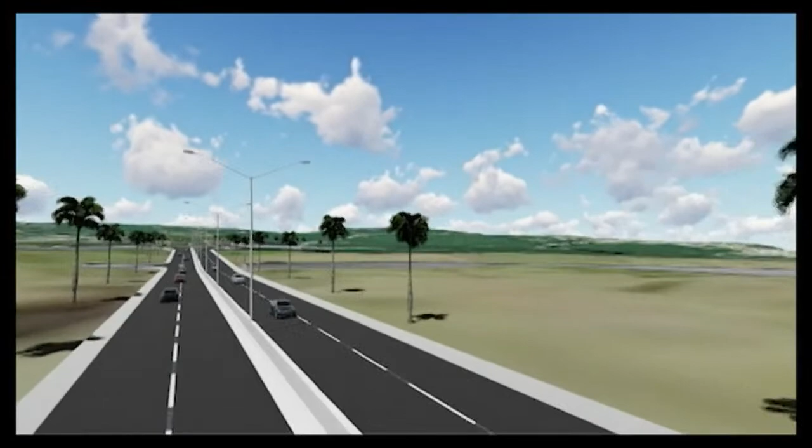Welcome to the virtual town hall public meeting for the proposed Montego Bay Perimeter Road, Long Hill Bypass and West Green and Barnett Street upgrade in St. James. This public meeting by virtual means is being undertaken by the National Road Operating and Constructing Company, NROCC, grantors for Highway 2000, for the presentation of its environmental impact assessment for the proposed Montego Bay Perimeter Road project. This process is heavily regulated and monitored by the National Environment and Planning Agency, NEPA.

Why this town hall, and why not a face-to-face meeting and consultation by NROCC with stakeholders? The ongoing COVID-19 pandemic and restrictions on public face-to-face gatherings have limited the ways in which stakeholder engagement on project-related matters can take place. COVID-19 doesn't mean a cessation of stakeholder engagement. It means finding other legally permissible ways of engaging with stakeholders and the public, hence this virtual town hall.

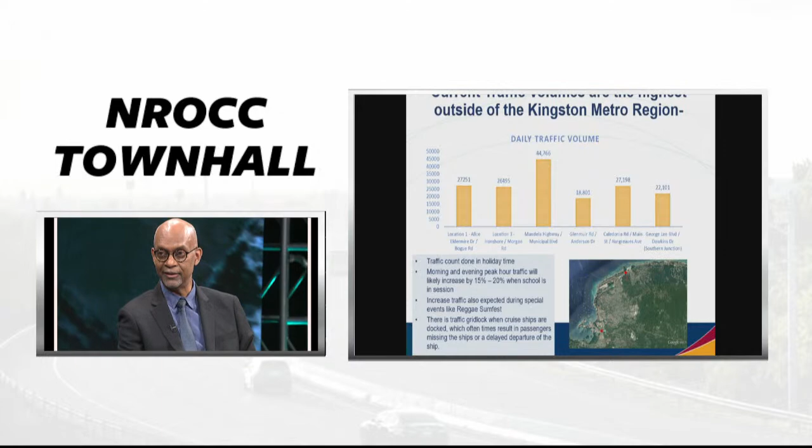Compounding this problem is the issue of the traffic in Montego Bay. In fact, until we actually started looking at the Montego Bay area, it was difficult to understand why there was so much traffic until we actually started to count the traffic. And at that point, we recognized that the traffic in Montego Bay was actually, outside of Kingston and St. Andrew, the highest traffic in the country.

So in fact, the Howard Cooke Boulevard, Alice Eldemire, Bogue Road intersection had some of the highest traffic volumes anywhere, as I said, outside of Kingston and St. Andrew and Portmore. We also looked at other issues which compounded the problem of traffic, which is the flooding issue. As anybody from Montego Bay knows, the North and South Gully are notorious for flooding. And when those become over capacity, then we have significant flooding in Montego Bay.

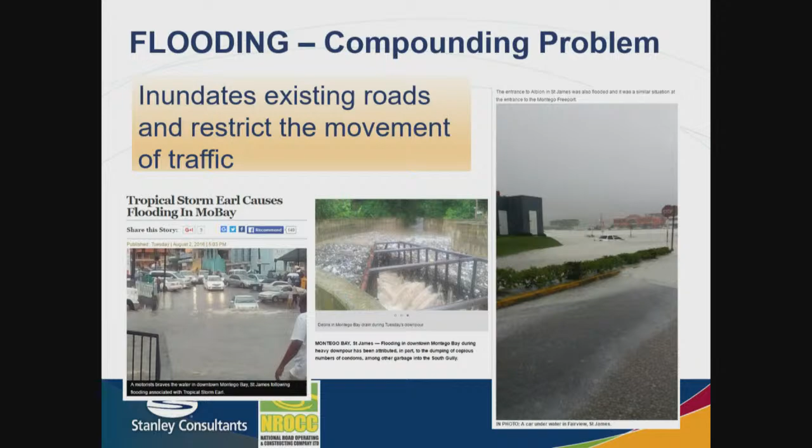Also compounding the problem is the cruise ship arrivals into Montego Bay. Over the next 3 years, the cruise ship arrival passengers are expected to grow from about 645,000 to about 745,000. Similarly, the arrivals at the airport are also expected to grow significantly over this period of time. Also compounding the problem is the many movements that we have across the Howard Cooke Boulevard.

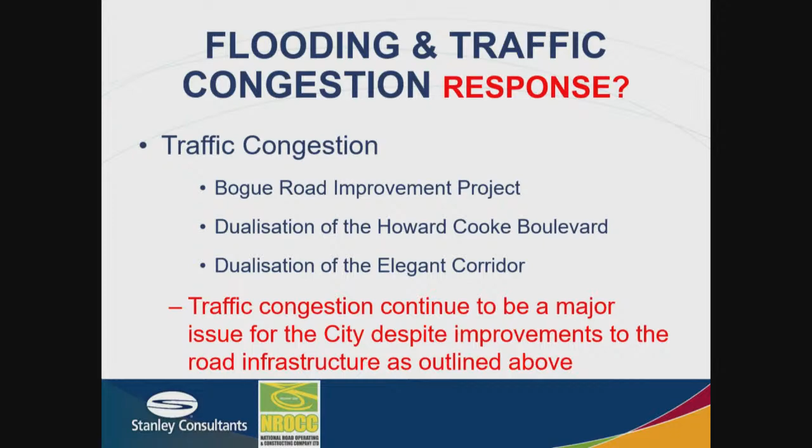So a number of steps have been taken to try and improve and correct the problem. The Bogue Road improvement, the dualization of the Howard Cooke Boulevard, the dualization of the Elegant Corridor. But despite all of these, we continue to have the traffic congestion problems in the city. But how does the traffic congestion manifest itself?

So if you look at two of the main corridors which go into Montego Bay, and most people know these two roads, typically we call them the top road and the bottom road. Gloucester Drive on the bottom and the top road, which is Queens Drive. If you look at the time it takes to get from one side of Montego Bay to the other side of Montego Bay, you quickly recognize that there are significant delays as you go through Montego Bay.

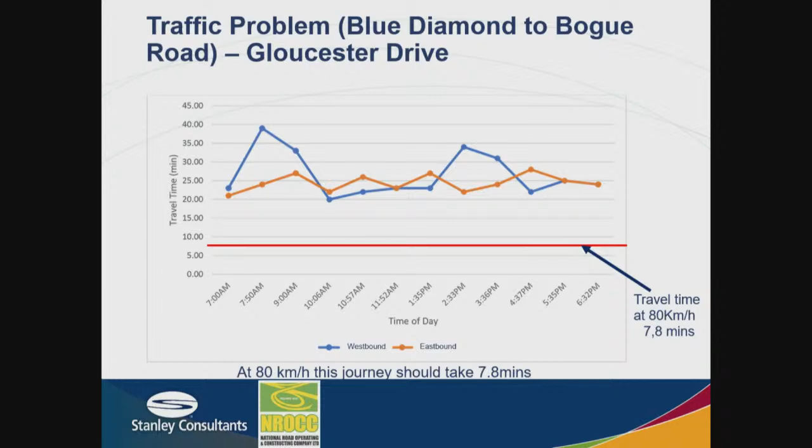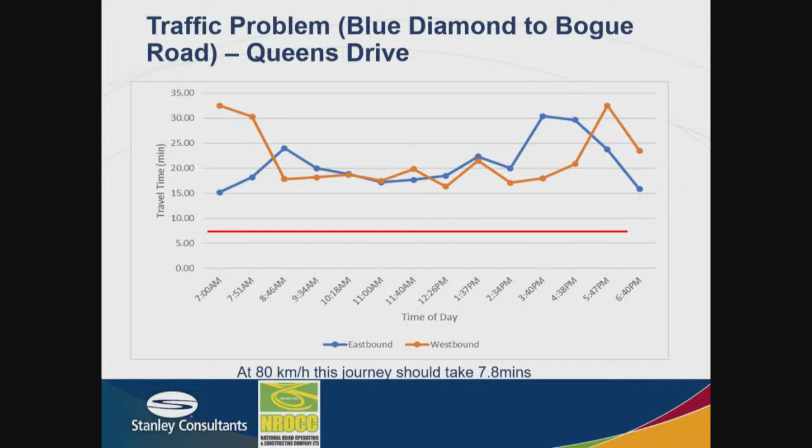Similarly, if you look at Queens Drive, which is the other road, the other alternative, so when you're coming into Montego Bay, typically most drivers will have two options, either driving along the bottom road or driving along the Queens Drive, which is what we call the top road. You have the same issues, significant peaks, significant delays in terms of getting from one side of the city to the other. Again, as I said before, a distance that if you're traveling normal vehicular speeds, it would take you of the order of 7 or 8 minutes to travel across the city.

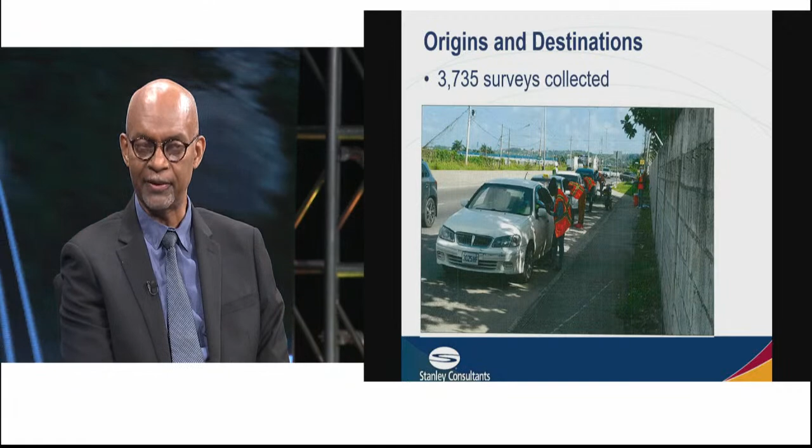So we tried to understand what was causing the problem. Why is there a congestion problem? Where are people coming from? And where are they going to? And so in order to do this, we set up what we call 7 traffic analysis zones throughout the city, where we started stopping people and asking them questions about where they're coming from, where they're going to, in order to try and understand why we have this significant congestion problem in Montego Bay, and would a bypass, for example, help solve that problem? Because we needed to understand how many people wanted to go to the city, as against how many people were just passing through the city.

So we did about 3,700 surveys. And out of those surveys, we came up with what we thought was an estimate of how much traffic would likely go around Montego Bay rather than going to Montego Bay.

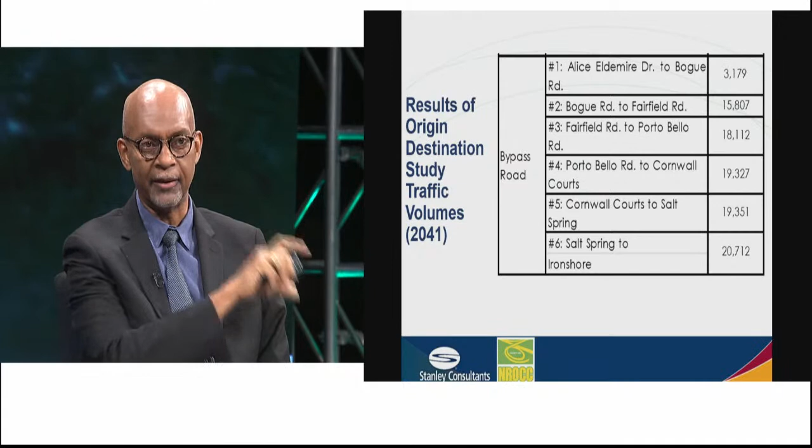That's how many people were destined for the town of Montego Bay, as against how many people wanted to either go through to Negril or vice versa, go through to Ocho Rios. And based on that, we came up with some projections in terms of what the traffic on the bypass would look like, how many people would choose to use the bypass if a bypass was built.

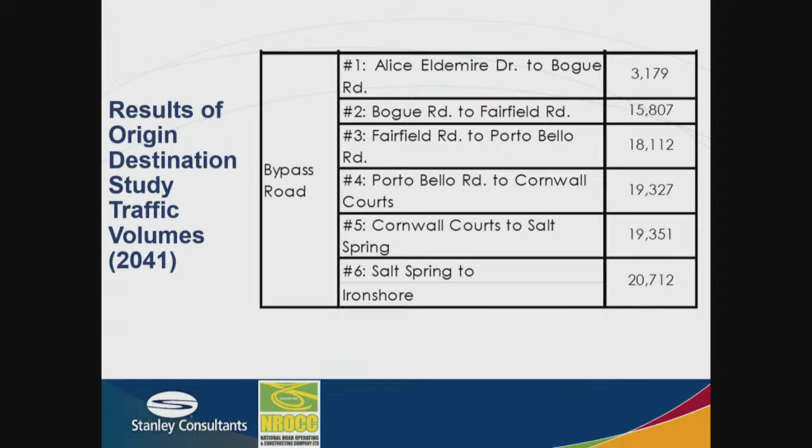And what you see on the screen are some estimates of the traffic along the various sections of the bypass. So the bypass starts on the Iron Shore side, actually at the bottom of the screen. And so from Ironshore to Salt Spring, there'll be of the order of 20,000 vehicles on the bypass. Between Cornwall Courts and Salt Spring, of the order of 19,000 vehicles. Between Porto Bello and Cornwall Courts, another 19,000. I'll show you the alignment so you can get a better feel for where these locations are.

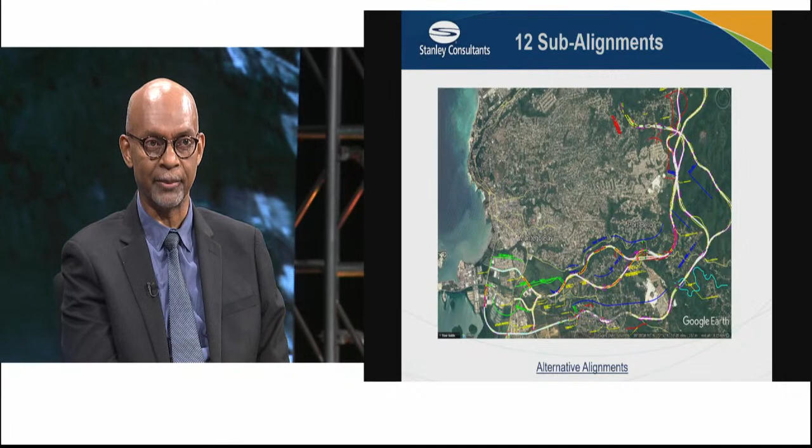So once we understood how much traffic would be on the bypass, we then started looking at what are the alternatives for building this bypass road around Montego Bay. And so we did a number of different alternatives. In fact, we did 12 sub-alignments looking at different areas, different ways to get around Montego Bay. Obviously, because Montego Bay is now built up, we had to find a way through the existing developments which are on the bypass. And these options included a number of tunnel options.

In fact, interestingly, when we did this study in 2001, when the original studies for the Montego Bay bypass were done, tunnels were some of the options which were considered at the time. And so we looked again at the viability of building a tunnel, which would shorten the distance around Montego Bay. So we came up with a number of criteria, and we used these criteria to evaluate the various options. And from these options, we came up with what we call a preferred alignment.

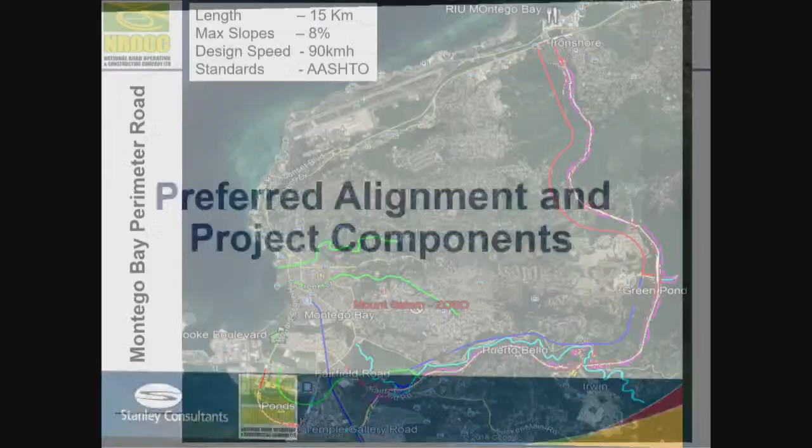And so that preferred alignment starts at about Iron Shore. So if you're coming from Kingston, just about where Iron Shore is, where Blue Diamond Shopping Center is, most people in Montego Bay know Blue Diamond. We start just by the gas station at Blue Diamond, come up the hill above Cornwall Courts and wrap around, going back around onto Bogue Road. And I'll show you a tour of what that alignment looks like.

So this is just a quick tour, which takes us along the Montego Bay bypass alignment, starting from the Howard Cooke Boulevard side. Just giving it a little time to load. Thank you.

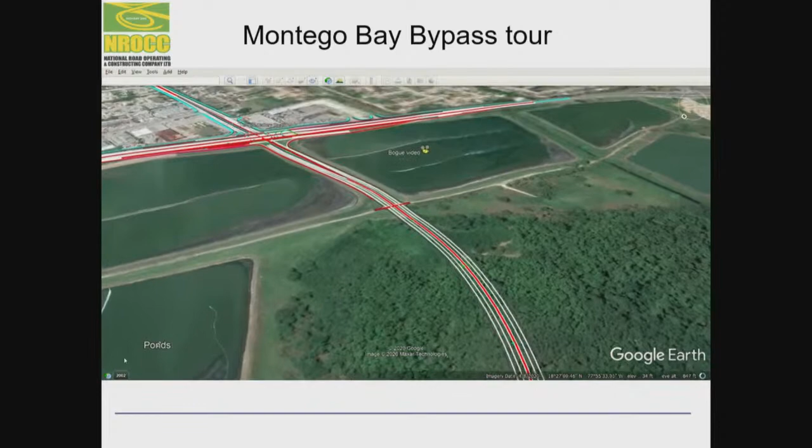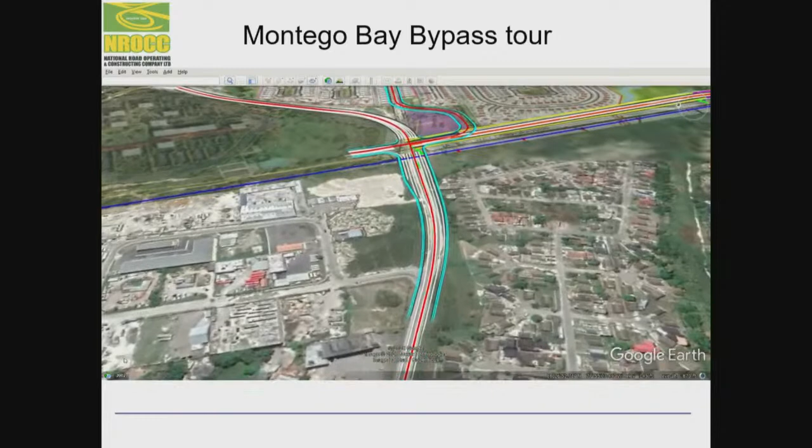All right, so if you think of driving down the Howard Cooke Boulevard going west, we continue going west, and then we wrap around the sewage ponds, which everybody in Montego Bay knows, on Bogue Road. From there, we go across Bogue Road itself with a grade separated interchange. We go past ATL Motors on the right and JUTC on the left. And then we find our way through Temple Galley Road, which is a narrow road which we're widening to 4 lanes.

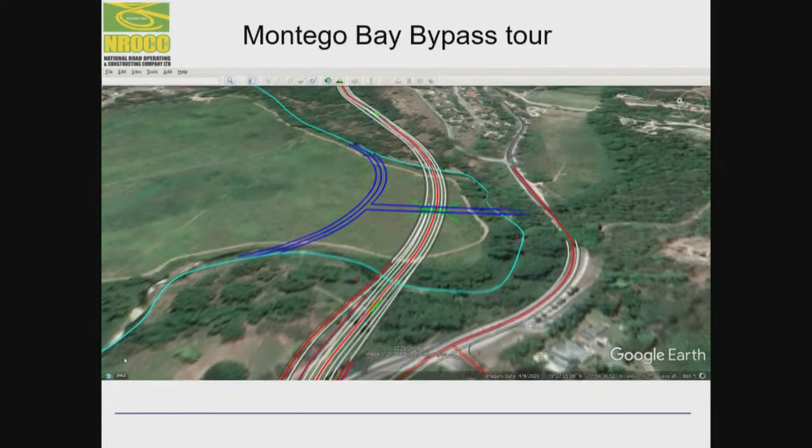From there, we go past Bogue Village and past what is supposed to be the new UWI campus in Montego Bay. We go across Fairfield Road, and from here we're running pretty much parallel with the Montego River, climbing up the hill, trying to find the way through the existing developments. So we climb up the hill, again, for people who know Montego Bay. On the left, we have Portobello developments, and on the right, we're coming up to Irwin, the Irwin developments.

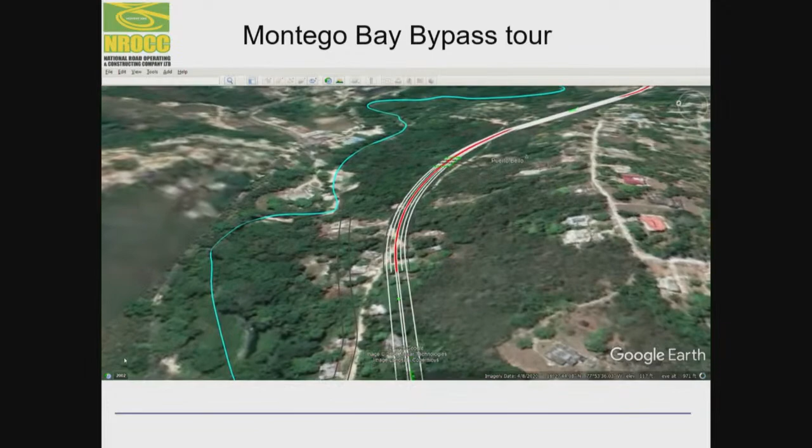We have, obviously, a lot of new infrastructure being put in, new bridges to come across the Montego River in this location, and a lot of new interconnections. So we're connecting from one side of the river onto the other side of the river, from the Irwin side onto the Portobello side. And also at the same time connecting some rural roads, the road from Adelphi, tying it into the highway at this point. So at the Irwin location, we have a new interchange.

From Irwin, we then continue up the hill. We're now almost at the highest point along the alignment, which is in the area of Cornwall Courts, just behind where we have Green Pond High School. One of the things to note as we go through this area, there are a lot of lands being opened up for development. So this is not only a transportation project in the sense of reducing travel times, but it's going to open up significant new lands for development in that area.

So we go past Cornwall Courts, past Green Pond High School, and then we start making our way down on the other side of Montego Bay. So we're now on the Iron Shore side of Montego Bay. From here, we go through the South Spring developments, and then down the hill, coming up to Iron Shore on the right-hand side, again opening up new lands for development,

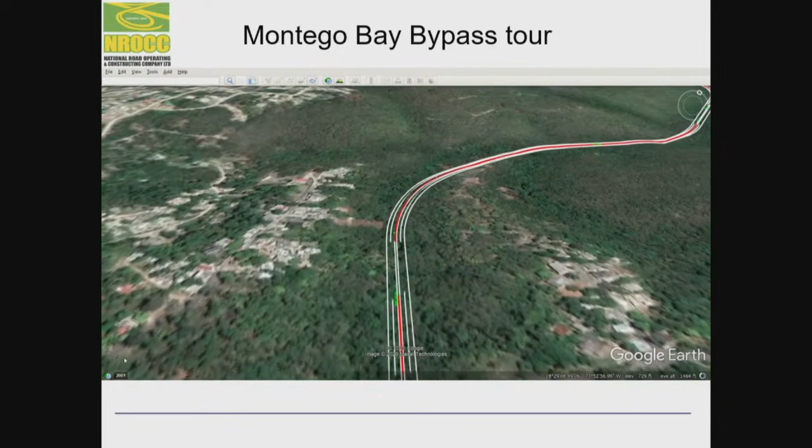and then coming down, finally down into the North Coast Highway, again down into the Elegant corridor with the hotels on the northern side. So this is just an illustration of what the Montego Bay bypass will look like.

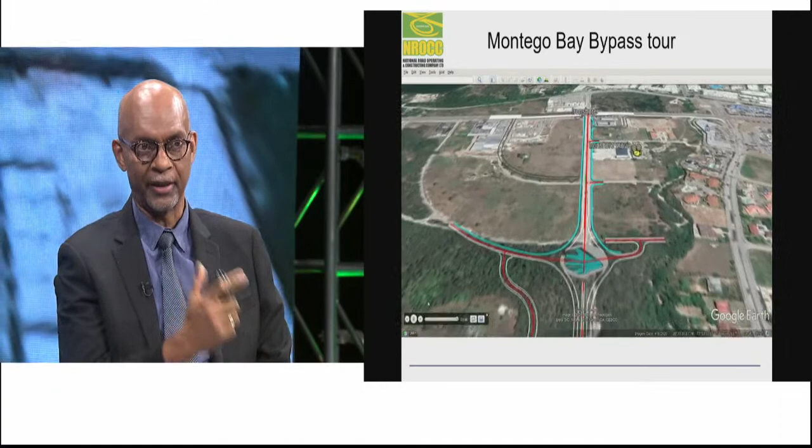Part of the project is also what we call the Long Hill bypass. And the Long Hill bypass is another critical part of the project, which will see us bypassing what is currently called Long Hill. So just to finish up, as the video comes in, we're coming into the Elegant corridor with the hotels on the northern side.

So this is approximately 15 kilometers of roadway, and what this will do is deal with the congestion for people who don't necessarily want to come to Montego Bay, but who want to go around Montego Bay, or people who work on either side of Montego Bay, and therefore who don't necessarily need to go into downtown Montego Bay.

But as I was saying, another critical part of the project is the Long Hill bypass. So again, for anybody who lives in Montego Bay, the Long Hill Road is a winding road which connects the Montego Bay area to the south of the country. And so what we've done is to tie this new Long Hill bypass into the project. So part of the project will see us building what will actually become the first section of our Highway 2000 project, from Montego Bay going all the way back to Mandeville on the other side.

Let me just see if the video will start up.

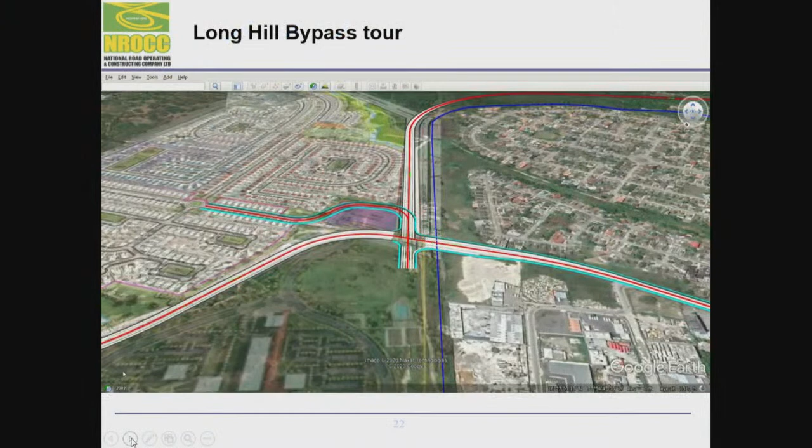So as I was saying, the Long Hill Bypass project is approximately 10 kilometers. It starts along the existing Montego Bay bypass. So just where we were talking about earlier, where the Bogue Village starts, that's where the Long Hill bypass starts. So for those people who normally come down Long Hill through that winding road, frequently blocked by trucks and accidents, this is what we call the new Long Hill bypass. This will become the new connection of Montego Bay to the southern side of Jamaica.

Going down to Macfield. So the Long Hill bypass comes up through Bogue Hill, gets up to Anchovy. At Anchovy, we have a new interchange, which connects back the Anchovy main road to the new Long Hill bypass. From there, we have virtually green areas. So this is the Anchovy area we're coming across. From Anchovy, again, on a new alignment, continuing all the way down to Montpelier.

So the section that we're building as part of the Montego Bay Perimeter Road project is a section from Montego Bay to Montpelier in the first phase. Once that is completed, then we will start the construction of the other sections of the roadway.

You've got 15 minutes. Your time is just about up.

Right. So just to mention, there are two other projects which make up the Perimeter Road project. One is the Barnett Street project, which is just an improvement of Barnett Street, and similarly, the other is the West Green Avenue improvement. So those four projects make up the Montego Bay Perimeter Road project.

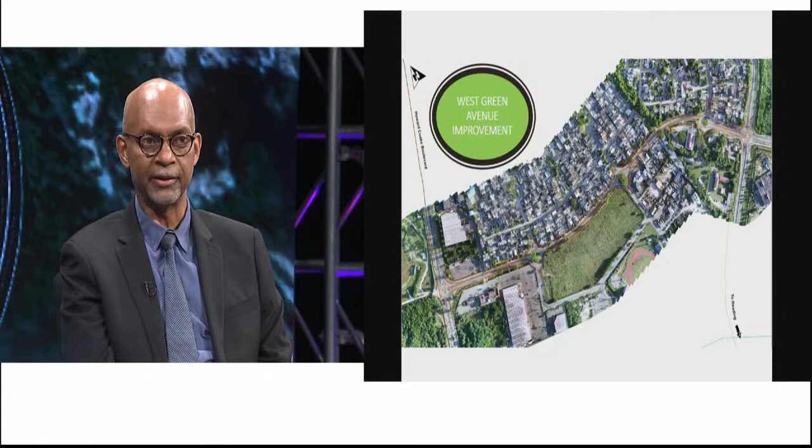Right. So thank you so much, Mr. Ivan Anderson, with an overview of this project. We're going to hear now from Dr. Carlton Campbell, Managing Director, CL Environmental Company. He will present on the findings of the EIA report. He has 20 minutes. Remember, stakeholders, you'll have 35 minutes to ask your questions and to get your answers.

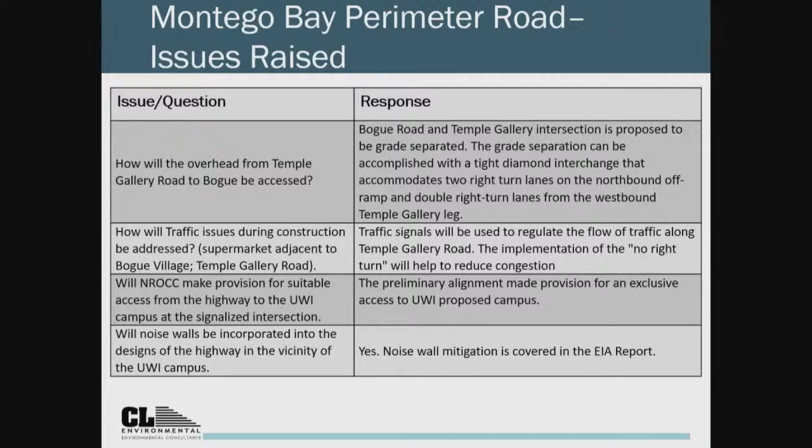We had some meetings and some of the issues that came out. Some of them were dealt with on these slides in terms of traffic, in terms of persons having property in the alignment, how it will be dealt with. NROCC has a relocation rehab plan. There are questions about how we deal with noise, which we have dealt with, in terms of access, especially for the UWI Western Campus. In terms of drainage, which is an issue that was raised.

A part of this project that's there is the drainage. There's a master drainage plan, which deals with drainage in and around Montego Bay. That was not dealt with in this EIA aspect because it's a separate section, but in terms of drainage, I'll assure residents that that issue was looked at.

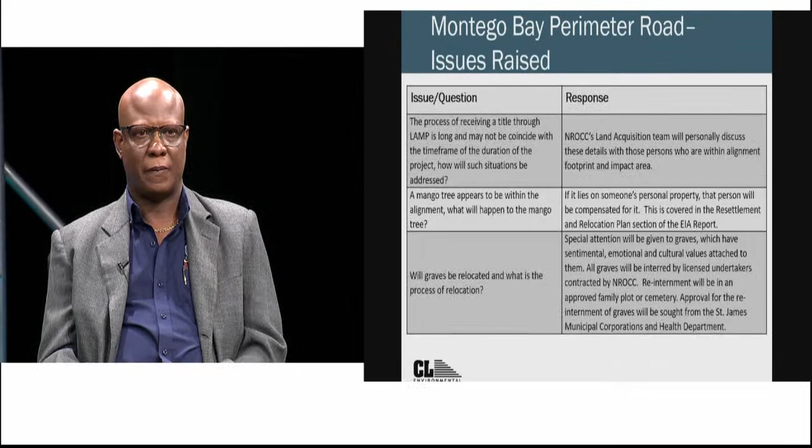Can you get it bigger? Right. Thank you. All right.

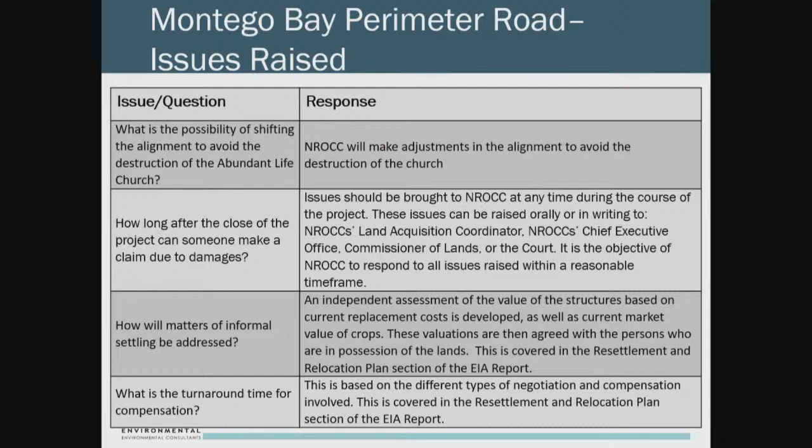There's also the possibility of changing of alignment, and that will be done with NROCC and their team in terms of discussions, in terms of some persons who might be impacted by the alignment. Question on how long you can lodge your complaints. You can do it both verbally or in writing to NROCC. There are also issues that came up in terms of access. How do we access the road?

There are issues of alignment in terms of how it impacted the flora and fauna, and those are answered in the EIA. That's to say that there are some issues that came up in terms of mangrove removal and also in terms of the broadleaf forest. We'll get into that later. There are also issues that were raised by a stakeholder, National Water Commission, which we took on board and we also dealt with in the EIA document.

We also had a meeting at West Green, where some of the questions that came up were in terms of children using the road, if there will be an overhead bridge, and the answer really is no, but there will be crossings at the intersections. There are also concerns about noise, dust, and vibration, which we'll deal with later on. And in terms of compensation, as I said, that will be dealt with by NROCC and the relocation compensation plan.

Also, the issue of drainage keeps coming up, and as I said, that is something that was dealt with in the study. There was also a question in West Green about accommodation for persons with disabilities, and the roadway will take that into consideration.

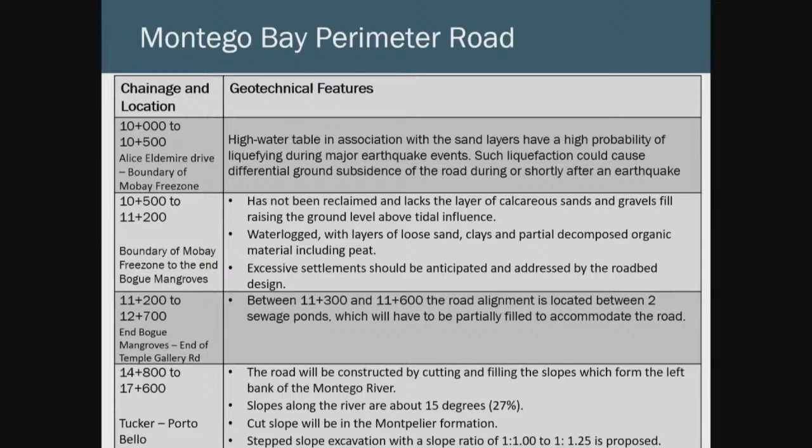In the Tucker Porto Bello area, based on the cuts, there's a possibility of rock falls, and also in terms of the drainage, we have to think about cross drains for the highway. One of the issues with road projects, when persons complain about flooding, is that the drains are not adequately sized, or the road itself is blocking the flow of water, and that's how the flooding really comes about.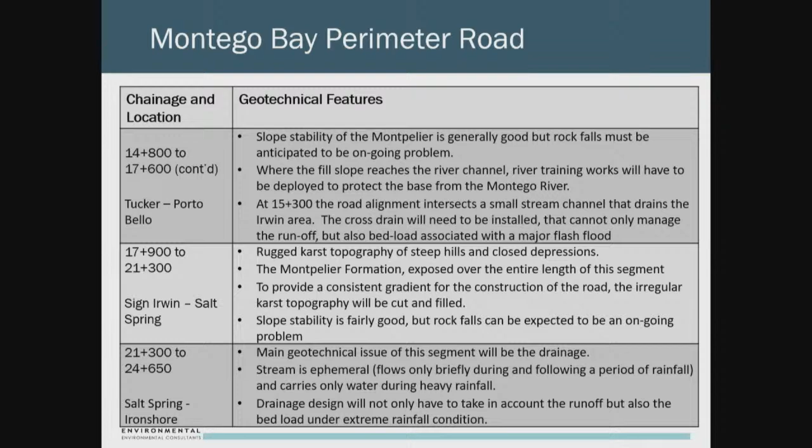In terms of the Salt Spring area, we have to think about the Salt Spring gut coming down into Ironshore. That watershed flows down. Persons would have seen the effect of it a couple of years back when Rio was flooded out in the Ironshore area. A lot of debris and water came down, and that was a problem.

On the Long Hill bypass section, the beginning, the Bogue area, we have issues of possible settlement, and as I said, that's something that can be engineered out. In the Bogue Wiltshire area, we can have rock falls, but you also have to look at the flows in terms of drainage so that we don't have an issue of what occurs now, where when you have rains, water comes down from Anchovy all the way down onto the coast. In terms of Wiltshire, Mount Carey, there's some issue with settlement.

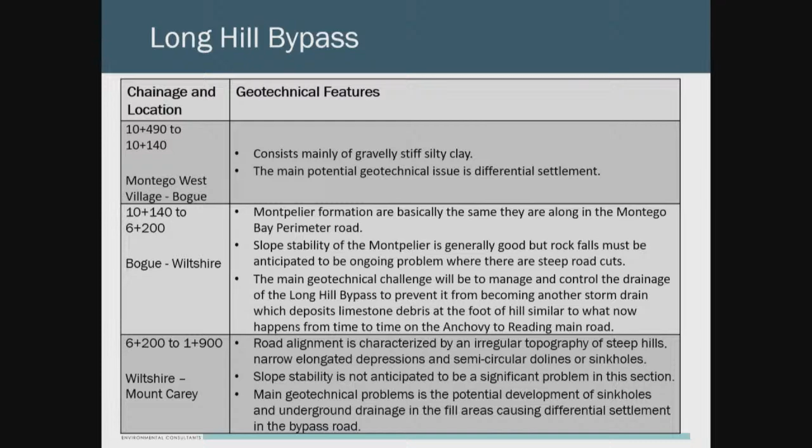And then closer to Mount Carey, there's an issue where we had to look at the Anchovy gully to make sure that allowance is in there so that the flows are not obstructed.

In terms of hydrology, the major thing on this project is the realignment of a section of the Montego River. And that area is down closer to... it slips me right now, but Fairfield, thank you. It's at Fairfield. And we know over the years that the river has overflown its banks in heavy rains.

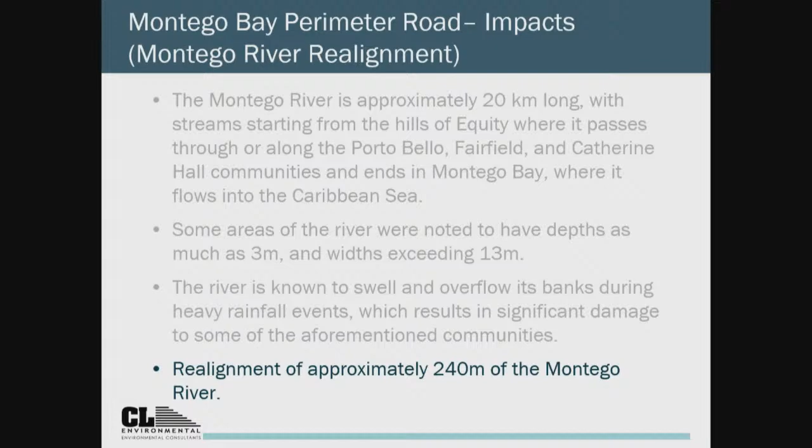So one of the things is that, while we are doing the alignment, the river would cross the highway at least twice in a short period of time. So what we have done is proposed to realign 240 meters of that river so that it doesn't cross the road. And this slide kind of gives you an idea of where it is.

There's another issue in terms of potential erosion by the Barnett Bridge, I should say, on the Montego River. And that image on the right gives you an idea of some of the erosion on the banks. And that's something that we'll have to take into consideration.

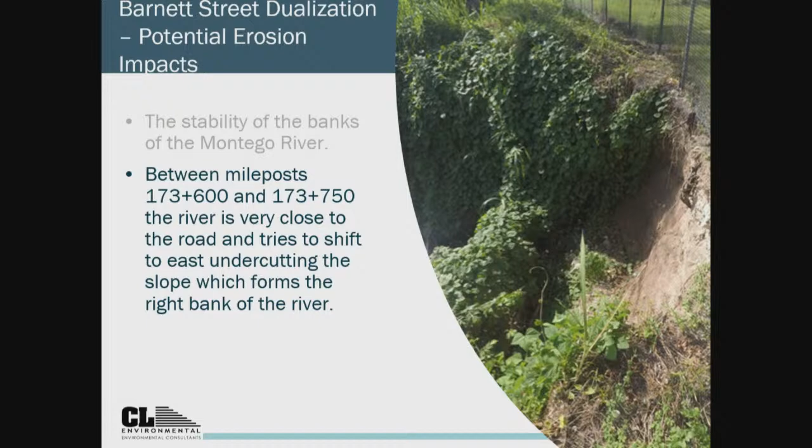In terms of the realignment, we also looked at what impact it would have on increased velocity of the river, because we are straightening it. But what we found was that the change was minimal, between 1% and 5%. But also, we'd want to do some river training just to ensure that the bridge doesn't fail because of erosion.

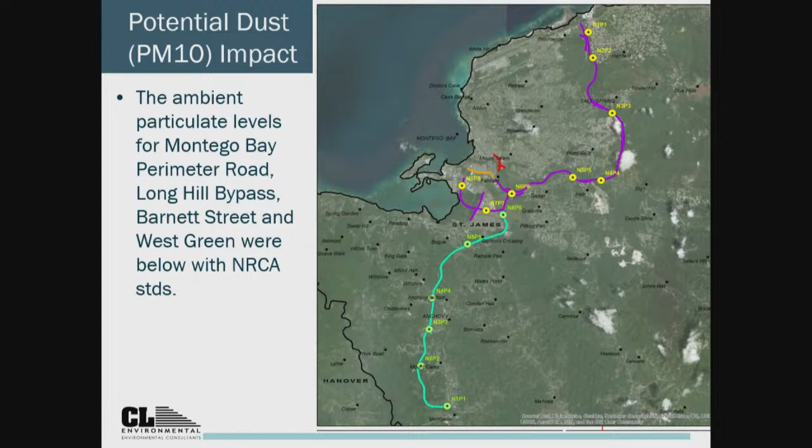In terms of dust, all of the ambient, which is the existing, were within the NRCA dust standards. But we know in a project like this, because you're clearing land, doing excavation, transporting material, there's a possibility of dusting. And there are some general things that you need to do to prevent that.

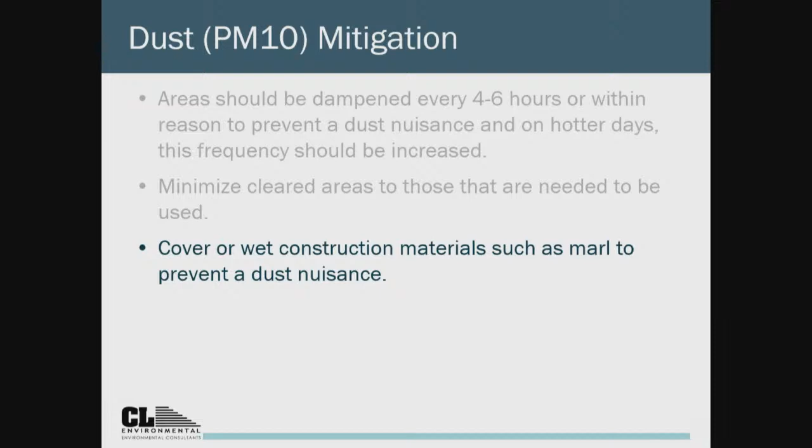You wet the area within 4 to 6 hours, and on a hotter day, you wet it more frequently. You minimize areas that are cleared, so you only clear the smallest amount of area you need, so that you don't create dust nuisance. You cover or wet construction materials, and for trucks transporting, you also ensure that they are covered.

Another thing is during construction, there are times when things fall off the trucks. You need to have persons there to ensure that they are swept up off the road.

In terms of noise impacts, we had looked at these tables to give you an idea of what we expect. The baseline is what's existing, and as you can see, as an example, this is West Green. All of the noise levels, both daytime and nighttime, have already exceeded the NRCA standard. So we are showing you with the mitigation what would happen.

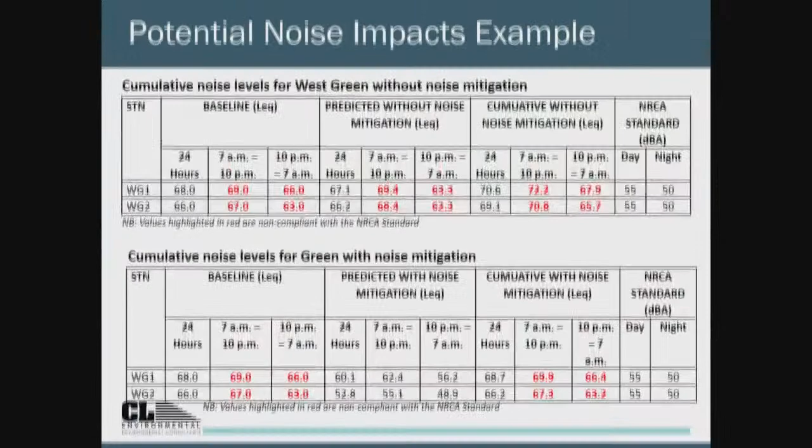So without mitigation is the top table, and the bottom table shows the cumulative impacts, which is the noise from the highway plus the existing noise. And if you look at that table, you'll realize that the mitigation steps really work. And what we are proposing are noise walls.

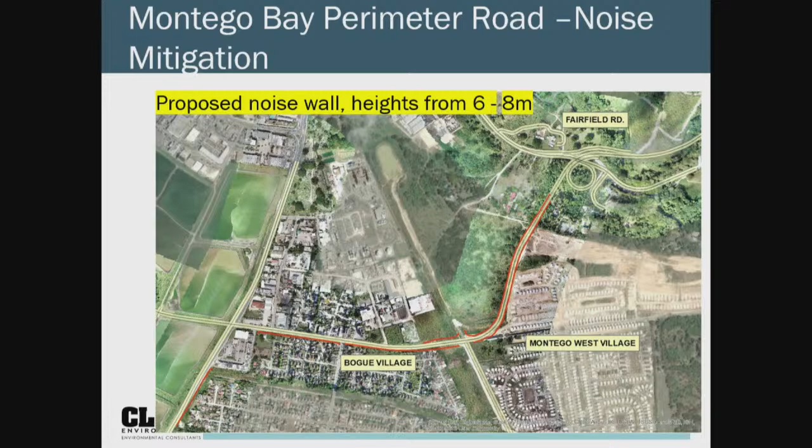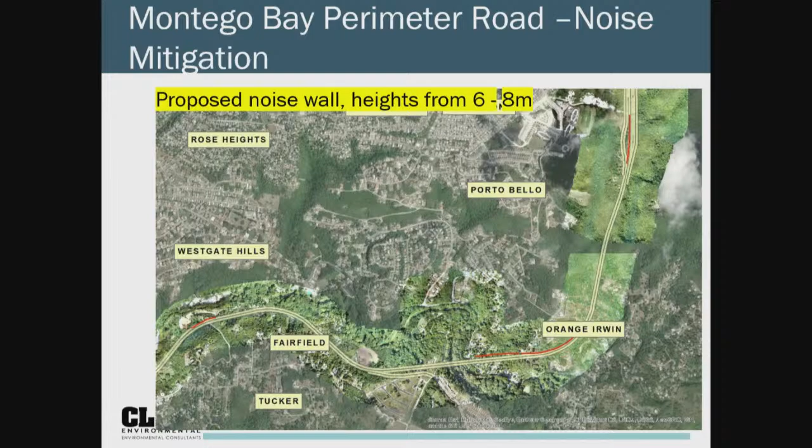These images give you an idea of where the noise walls are proposed to be. So you have Montego West, up Temple Gallery Road, near Orange Irwin, and of course Westgate. Salt Spring would have, and coming down into Ironshore. Those areas are proposed to have them.

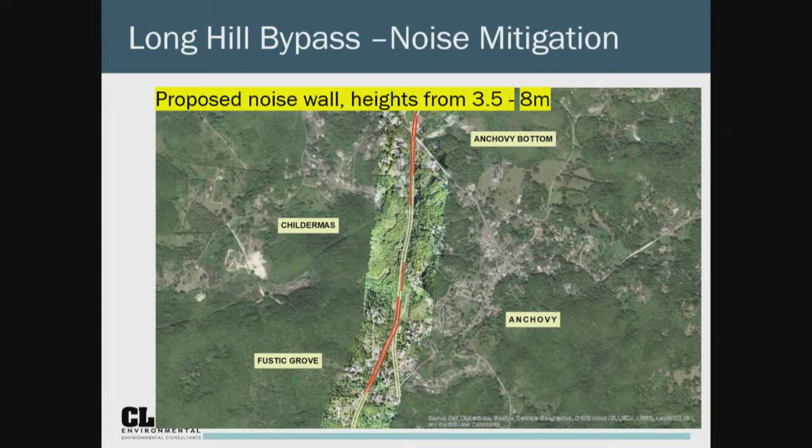On the Long Hill bypass, you have Montego Bay West Village again, up Garden Cross, up Bogue Hill, and also you'd have it on Fustic Grove and at Anchovy Bottom, and near York, Mount Carey area would also be another area that we'll think about.

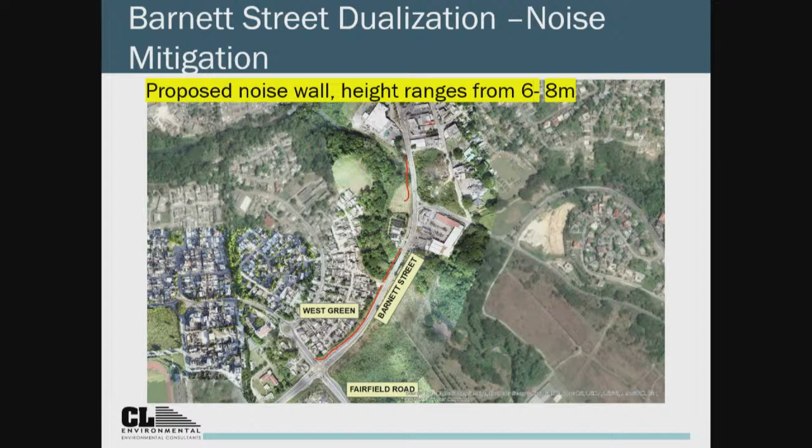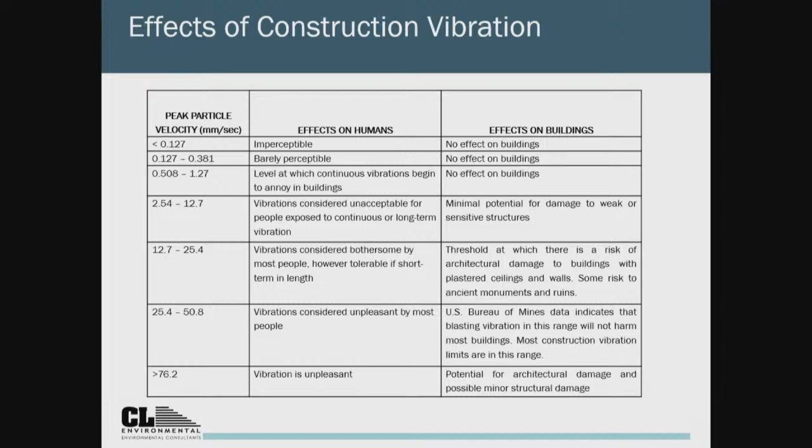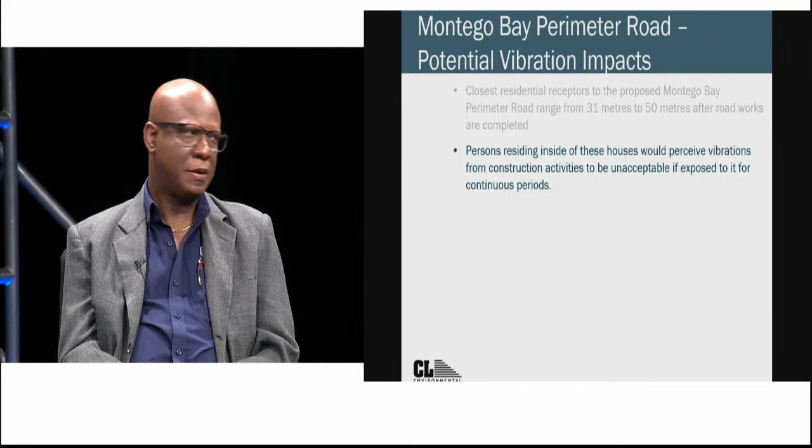So we looked at vibration in different areas and at different distances. We looked at where the closest residence would be to the proposed alignment. So the closest alignment would be between 31 to 50 meters of the Montego Bay perimeter road. Persons in these homes would actually be feeling the effect of construction.

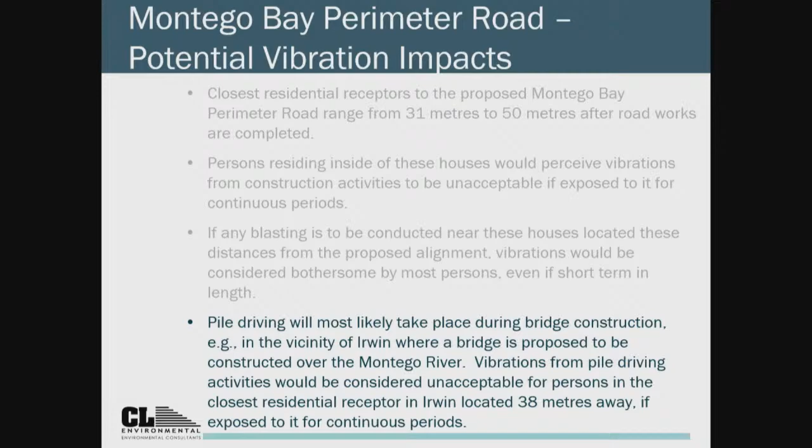If there's any blasting, then it would be even more. Pile driving, for example, in Irwin area where we expect to do a bridge, that for sure will cause more discomfort. This table gives an idea of the different types of construction equipment, predicting the vibrations based on the various distances from where the equipment are being used.

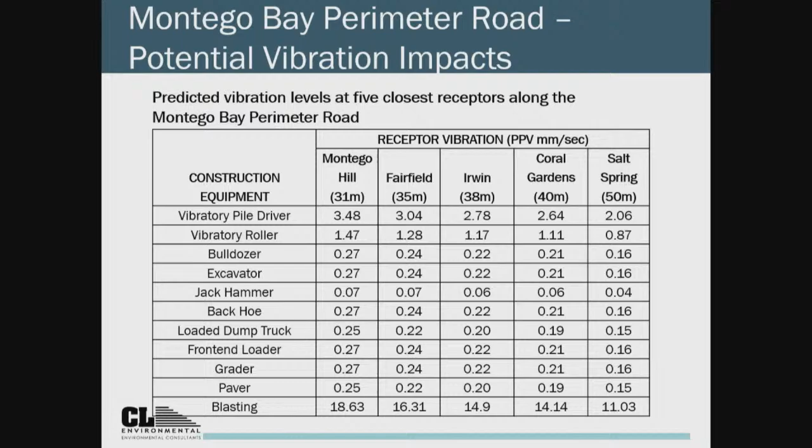We looked at the Fairfield Great House, and because it's a historic site, we looked at it. Pile driving would be an issue, but in terms of blasting, then you'd more likely have an impact on the architectural thing of the building.

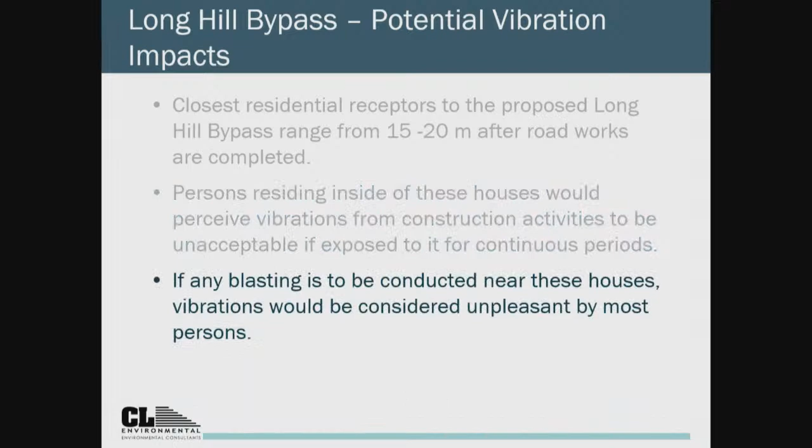In the Long Hill bypass, we looked at things closest to the buildings, closest to the alignment, at 15 to 20 meters. Persons, of course, as we were saying, would have an impact on them in terms of vibration. Blasting would also be a problem.

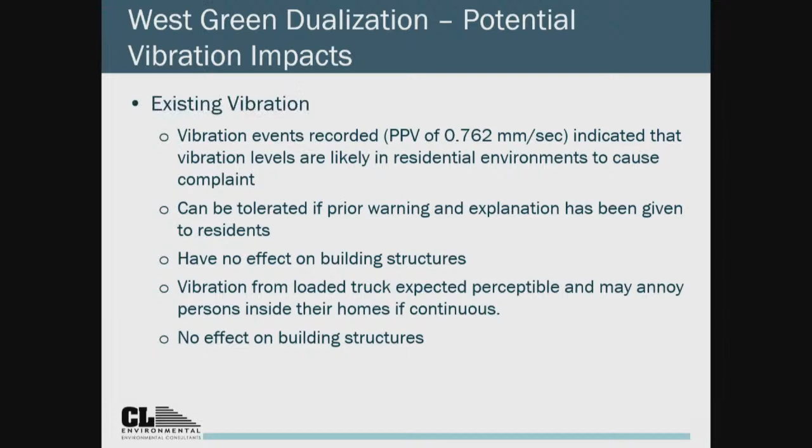West Green, we looked at West Green, as I said, that came up. We did recording, we did some measurements, and at the values that we got, those persons would really, at present with the traffic there, it supports what they're saying, in terms of that they feel a vibration when trucks and vehicles pass in there on the road. At present, there's no effect on the building, though, based on that.

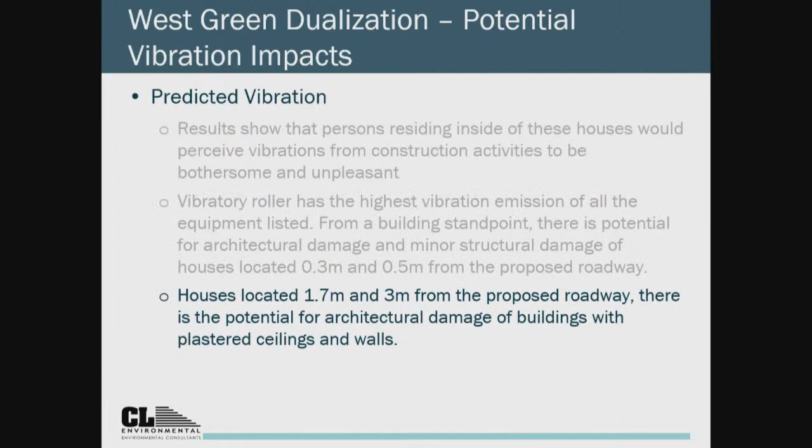We did some prediction in terms of what we expected. The vibratory roller would be the one that causes the highest vibration, and if it's used close enough to the buildings, then it can cause both structural and also architectural damage. These are the predicted values that we have looked at.

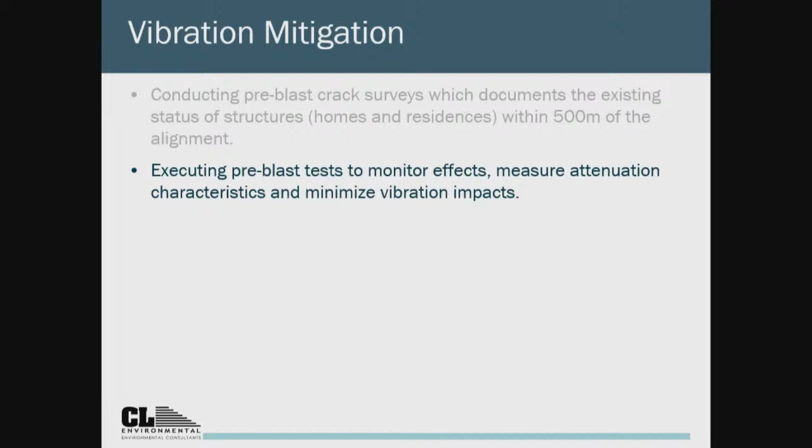So in terms of mitigation, some of the stuff - we will communicate with persons so they know what is happening and when, because that's one of the issues that makes it unpleasant. We also would have to do tests and surveys before, to ensure that we look at persons' buildings, so that when the work is done, just in case there's an issue, we can know what the building was like before.

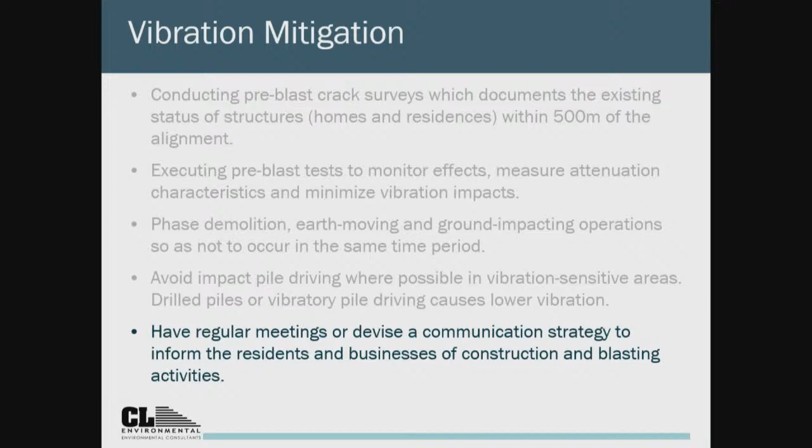And we looked at the type of equipment that's going to be used, and also to make sure that instead of using all of the vibrating type of equipment altogether, you look at phasing it - demolition, earth movement, ground impact - instead of doing all at the same time. That will help to reduce the impact of vibration. And as I said, have regular meetings with the persons.

As with all of these projects, alignments, there are times when persons find that their structures are in the proposed alignment. And in this case, there's no exception.

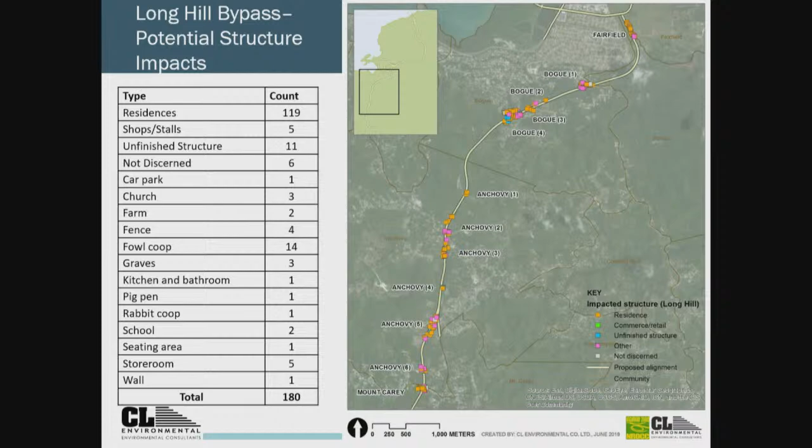For Long Hill, we expect about 180. And as I said, the maps on the right of the slide give you an idea of the areas in which we expect these to be.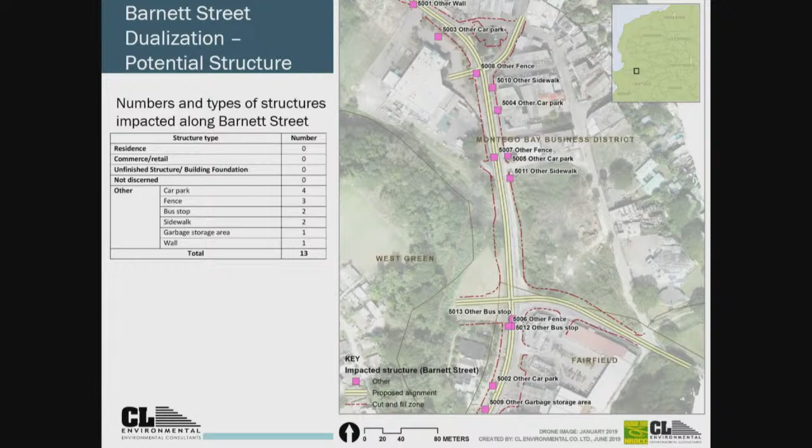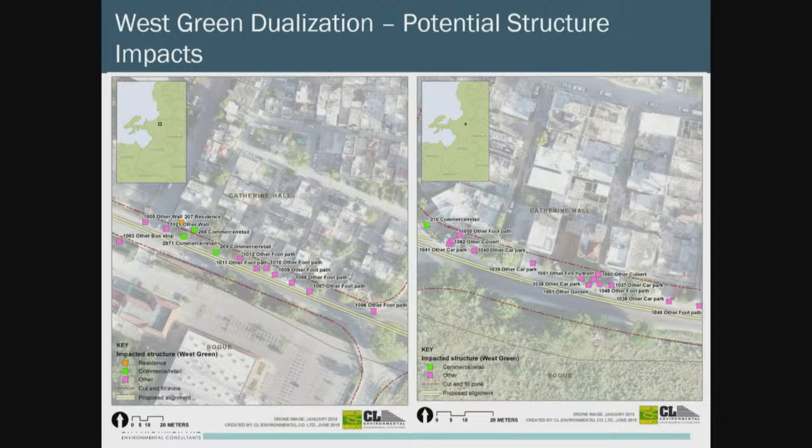And in terms of West Green, we have some - not houses, sorry - car parks, footpaths, bus stops, and other commercial side shops. These are maps showing you some areas along West Green where we have those potential impacted areas.

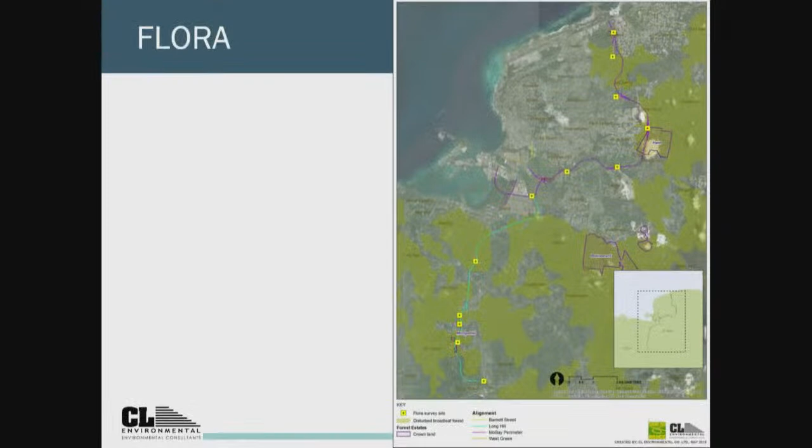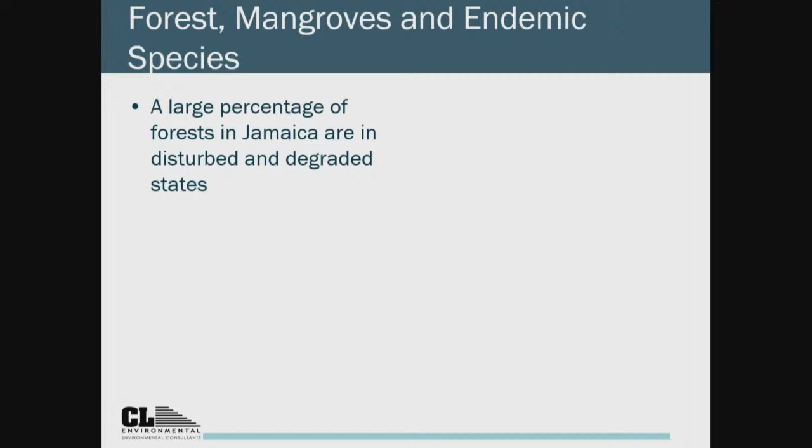A large percentage of the forests in Jamaica are disturbed and degraded. Here is not much different. There are some areas, but we have crossed some forest estates. There are endemic species that were found along them, example, the Thrinax. 15 endemic species were found, and the table gives you an idea of some.

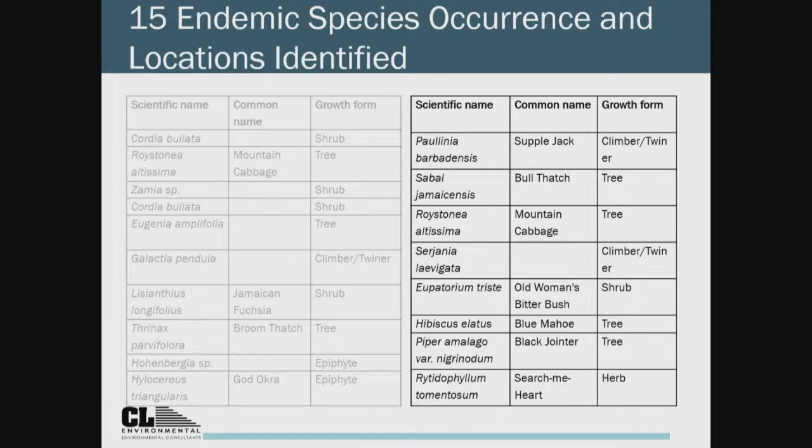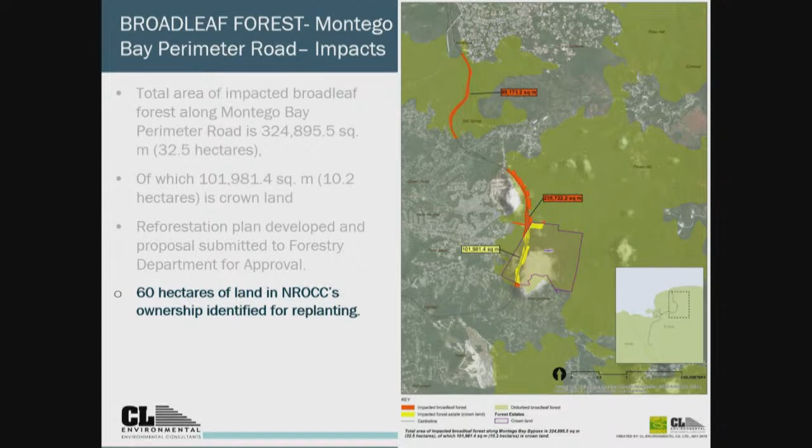So the broadleaf forest along the Montego Bay perimeter road, we expect to impact about 32.5 hectares. 10.2 out of that is in Crown land, but there's a reforestation plan that was developed and the proposal submitted to the Forestry Department. NROCC has 60 hectares under their ownership to do replanting exercise.

Along Long Hill, we expect about 34.7 hectares, most of it in private lands. And of course, as I said, the plans are in place, awaiting the approvals.

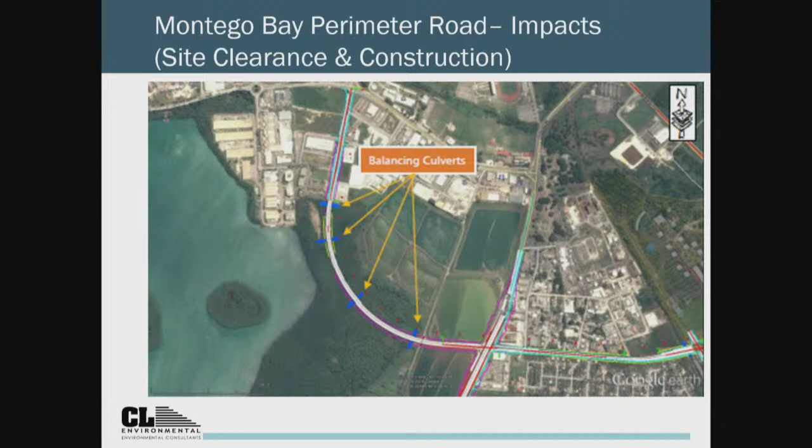Now the issue of the Montego Bay removal of mangroves, we expect to impact about 2.71 hectares of mangroves in the Bogue area. One of the ways of mitigating is replanting mangroves, and NROCC has already identified a site. For those that are left, we're putting in at least 4 balancing culverts that allow water to pass through so that one side doesn't get dried out, and also for mobile animals so they can pass through from one side to the other, so we don't block them off.

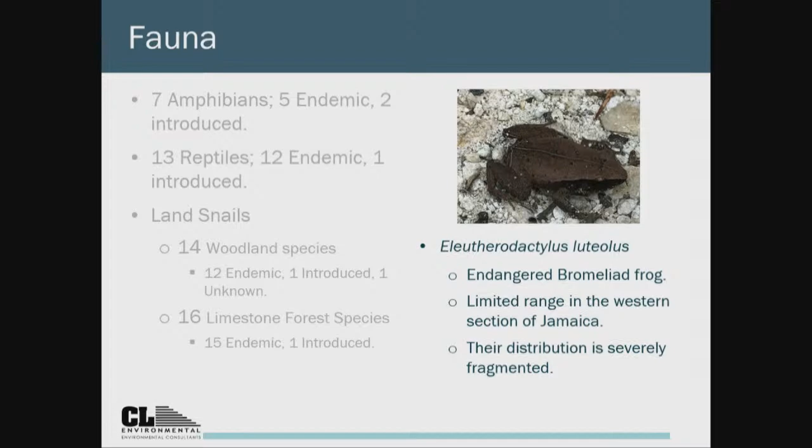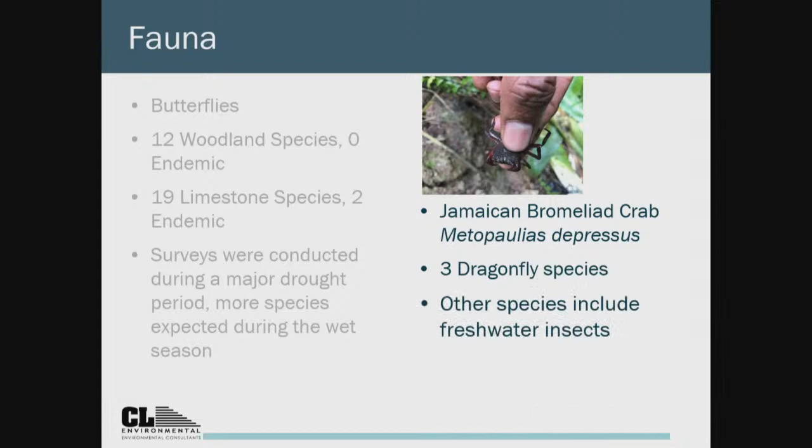There are also butterflies, and while these surveys were done during the drought, during the wet period we expect more species to be found. There's also the bromeliad crab that was there.

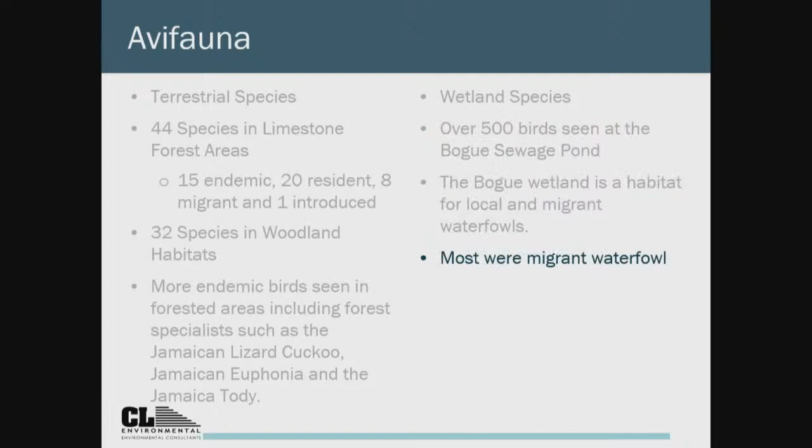For terrestrial species, 44 species in limestone areas, 32 species were found, and these are birds. More endemic species were found in the wooded areas. There are 500 wetland species in the Bogue Sewage Pond area, most were migrant waterfowls, and no wetland species are special. They will also look at bats in the area.

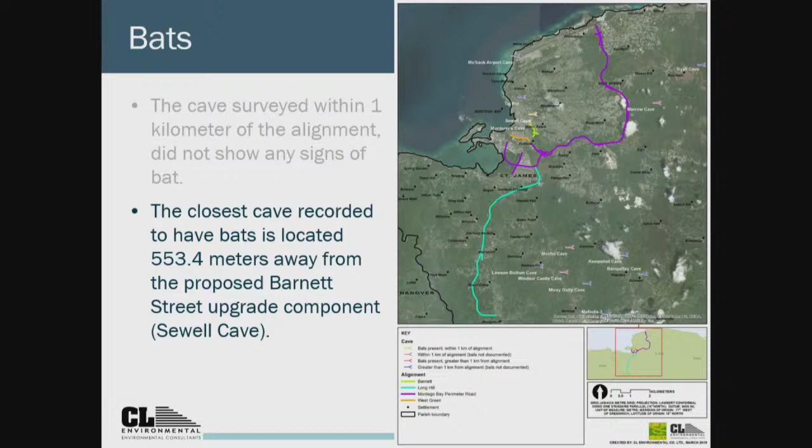Thank you very much. Yeah, good. Just in time, 20 minutes. Thank you so much, Doc, for that presentation with that report.

Let's take a break. When we come back, your questions. We know you have a lot of questions on this. You've seen the presentation, you've heard the potential areas of concern that were covered: drainage, dust, noise, mangrove removal, and so forth. You can send your questions.

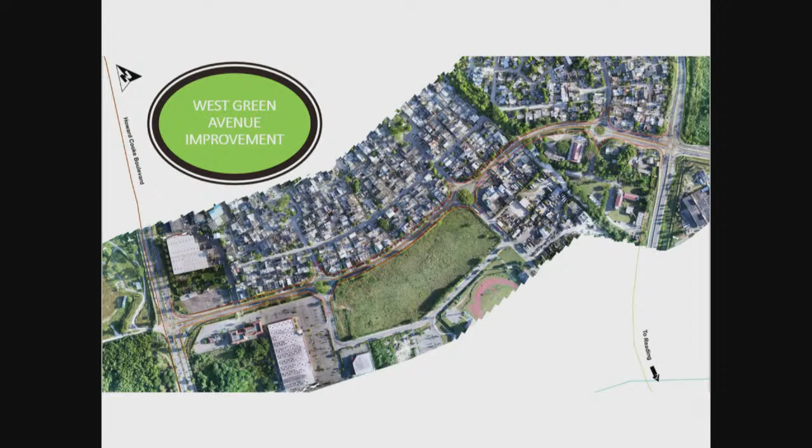So one of the other things that struck me when Dr. Campbell was making his presentation was the several endemic species in some of the areas to be impacted - bromeliad frogs and crabs, butterflies, and a number of other endemic species. How do we mitigate the destruction of some of these species? These are very crucial to the overall ecosystem of any country.

I'll let Dr. Campbell speak. So what you normally do with projects that would impact endemics, like plants, is that before you start, if they can move, you put them in nurseries, remove them, and plant them in another area that we know won't be disturbed. When you have them in the nursery, you do the project, then take them back out and replant. The frogs and stuff, some of them will move with the plants themselves because they're inside of the bromeliads. So that's the best way of doing it.

And the mangroves, in terms of mangroves, are tried and proven, internationally recognized - you do replanting of the mangroves. So you look at how much you'll be impacted. In the EIA, we gave you an estimate of how many mangrove trees would be impacted, and you replant that amount in the area that is specified.